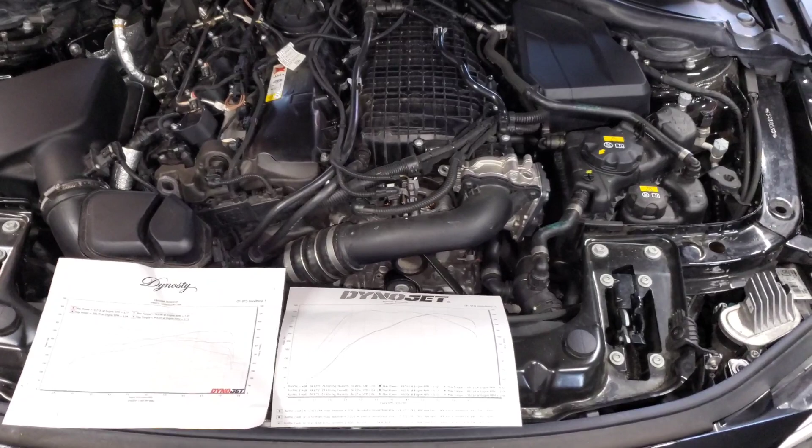So those are my numbers. With the custom tune, it hit 482 wheel horsepower on a Dynojet and a max of 502 foot-pounds.

These are my two dynos kind of side by side. Unfortunately, I couldn't do them at the exact same shop, but they are both on dyno jets, so similar setups.

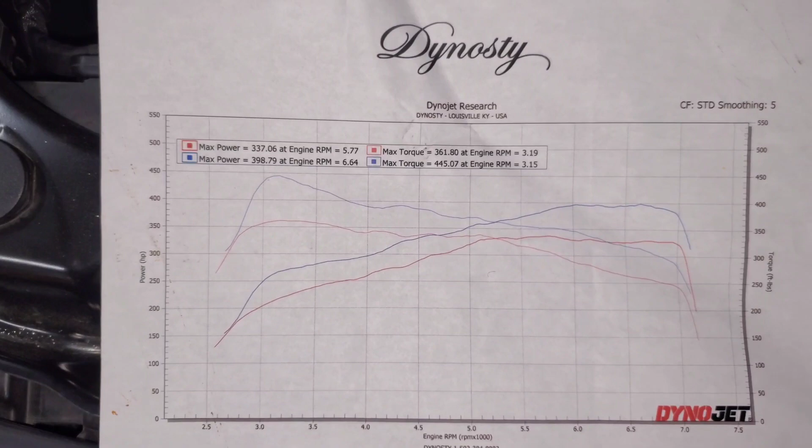On this first one, from stock to stage 1, I gained about 60 horsepower and almost 85 foot-pounds of torque. And then going to my custom tune, I gained about 85 horsepower and another 55 foot-pounds of torque.

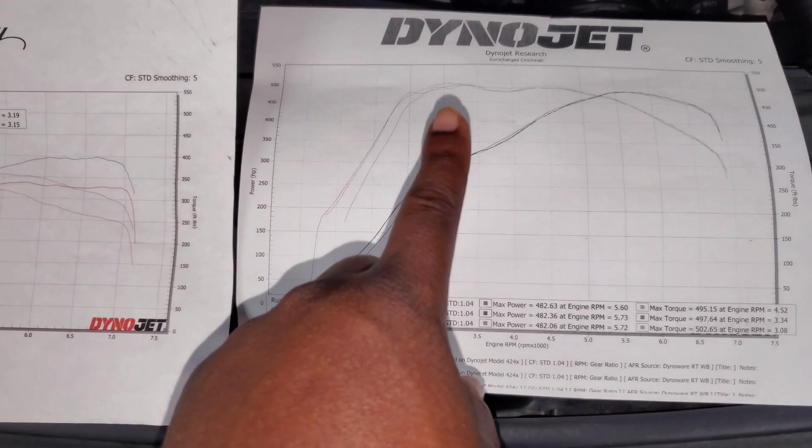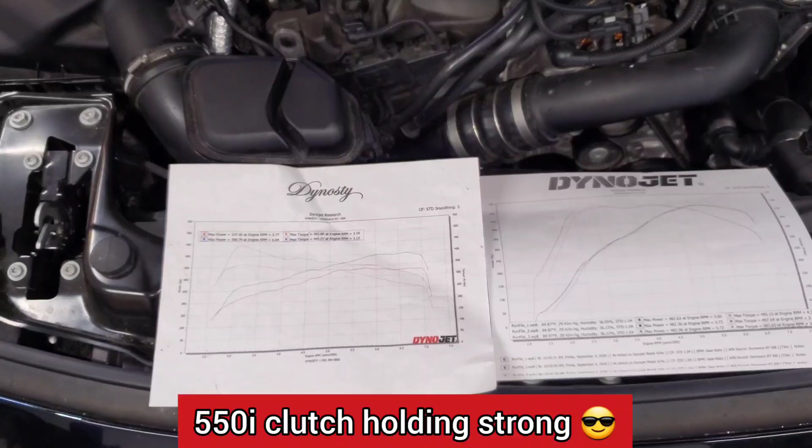So definitely noticeable gains. Even down low, you can see at 3,000 RPM, I'm putting out 500 foot-pounds now versus before, I was barely hitting 450. So more torque down low, more power up top. It definitely feels stronger everywhere, and the dynos kind of illustrate that.

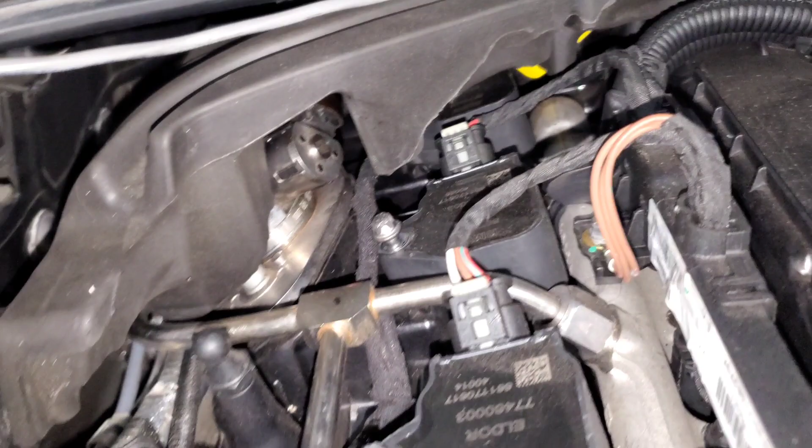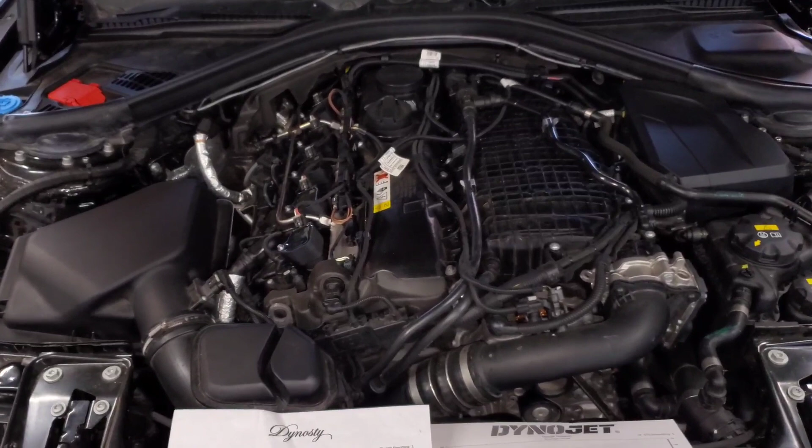So I've gotten a lot of questions about my setup. Just to confirm, I have the TU pump, I have the VRSF Downpipe. I ended up going back to stock intake just because the Dinan intake didn't net much of a gain in my experience. And then I added the CSF Heat Exchanger because this summer, with the temps going up, I wanted to help control the intake air temps.

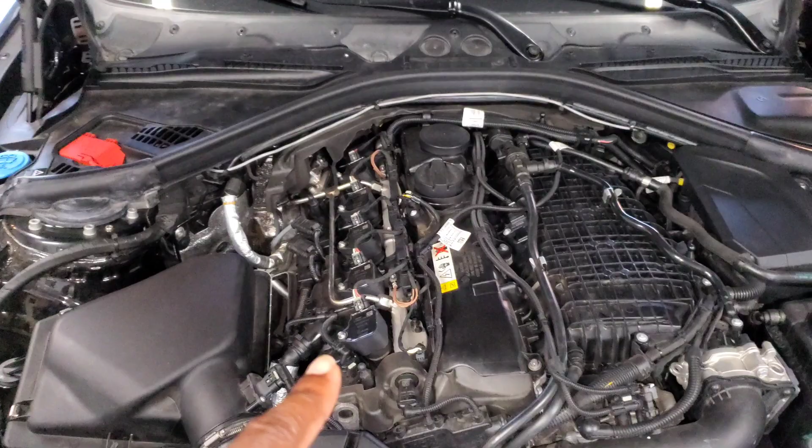I also did drop my spark plug gap. I still have the Champions, but when things started getting really hot, I started experiencing some spark plug blowout. So to compensate for that, I dropped the gap to 0.020 inches, and that fixed the issue for me. I've been beating on it every day ever since.

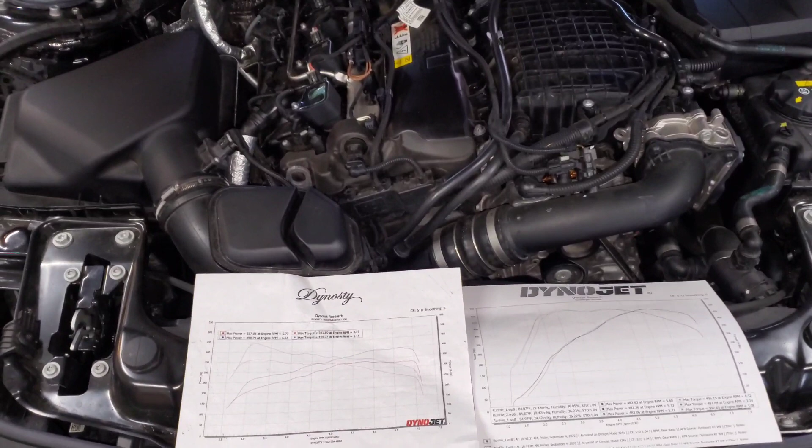So a quick review of my tuner. I went with F80 Paul, flashed over bootmod3, and he has been amazing to work with. He tuned progressively. Every revision was faster, and he worked towards the limits of the fuel pump.

I know a lot of people say that the TU pump can't support fully E85 or it'll crash, and I didn't experience any of that during the tuning process or during any of my driving experience. I've driven it down to 40 degrees Fahrenheit all the way up to 95 in the peak of summer, and I've had no issues. If you tell Paul what you want to do, whether it's road racing, drag racing, roll racing, or just daily driving like me, he can set you up with a safe tune that'll work in all the conditions you drive in.

So yeah, I mean, I highly recommend it. I highly recommend going with Paul, but I can't necessarily recommend the E85 tune.

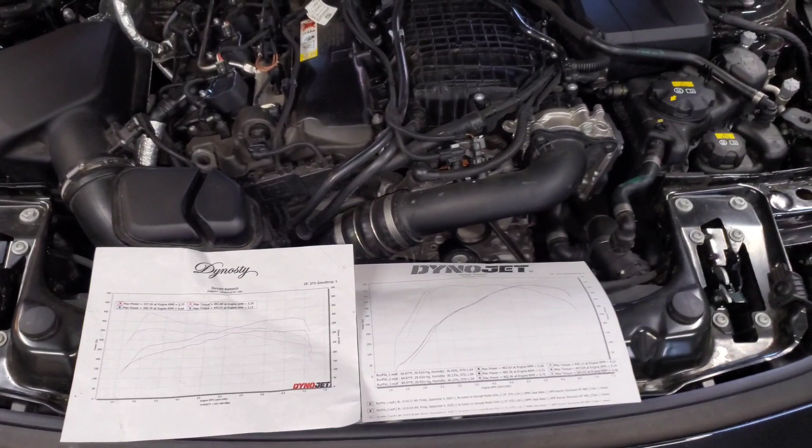Like I said, I installed the fuel pump back in December, posted that video, and then I started dialing in my tune in March of this year. Literally 3 weeks after I finished with my final revision, it took about 7 revisions, then MHD and bootmod3 came out with their off-the-shelf maps.

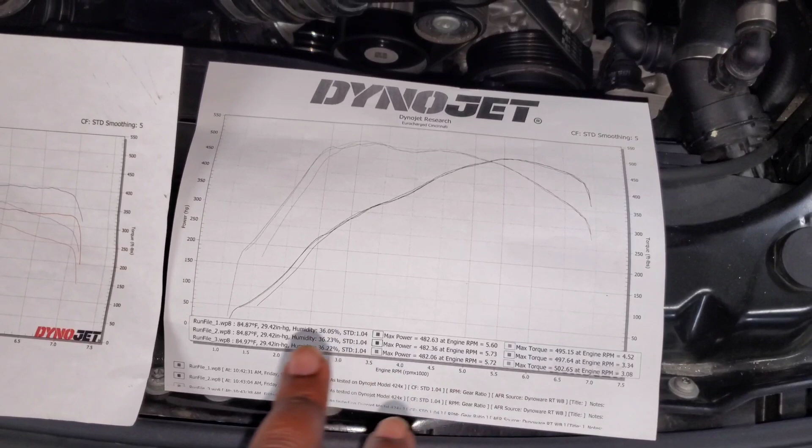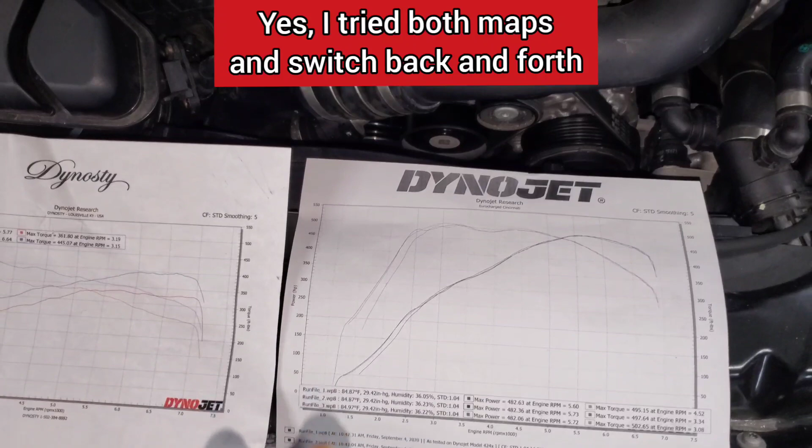If you compare that to my dyno, I'm hitting about 500 foot-pounds, and the dynos that I've seen on the Stage 2 Plus maps hit about 540 or 550, and I can see that in my logs as well. It hits more boost sooner because on E30 you can support more boost down low. However, up top, I am making maybe 10 to 15 horsepower more.

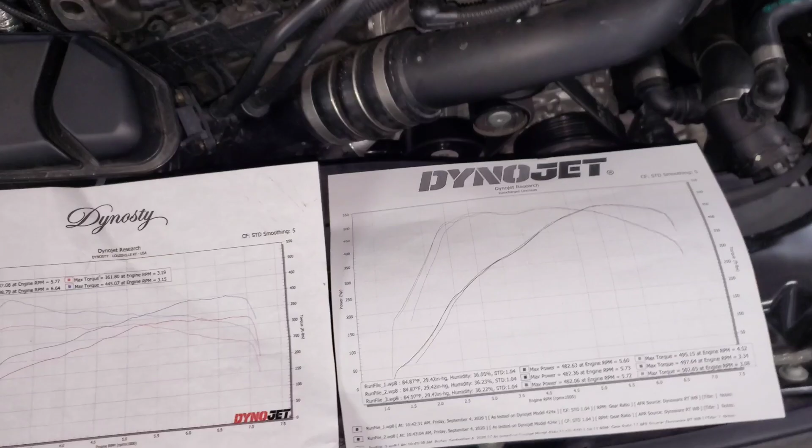So again, in my drag times and all of my testing, the E85 map is incrementally faster, but I can't necessarily say that it's worth paying for a custom tune to run fully E85.

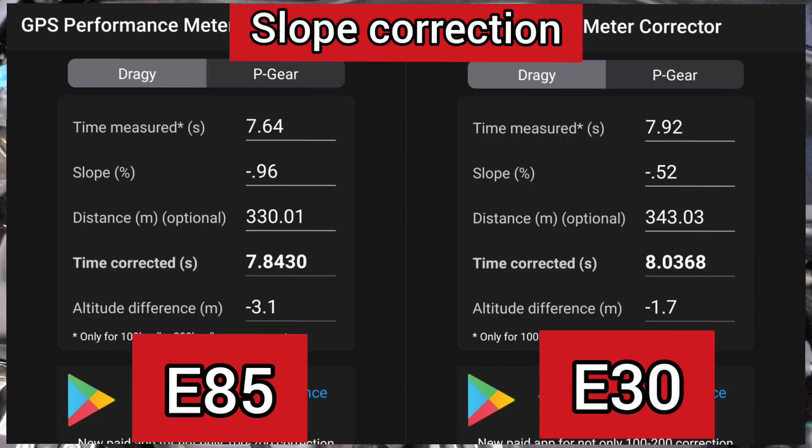The benefits that I do have right now is the car runs very strong, it runs cool, it smells good, like running with a catless downpipe. That was one of my aversions, is I didn't want to be able to smell gas in the car, and with E85 that smell is completely gone.

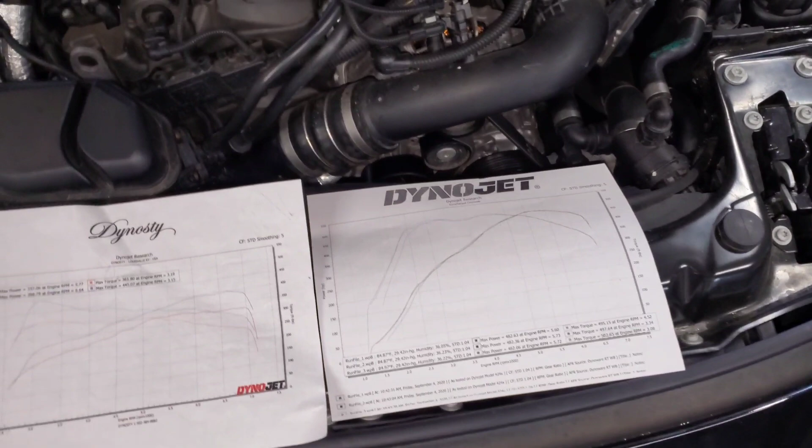But besides not having to mix and kind of those nice to have benefits, there really isn't a big power gain to be had. So if you're going with a custom tune on the TU pump, I'd recommend sticking with E30 to E50 to get the best of both worlds with low down torque and top end power.

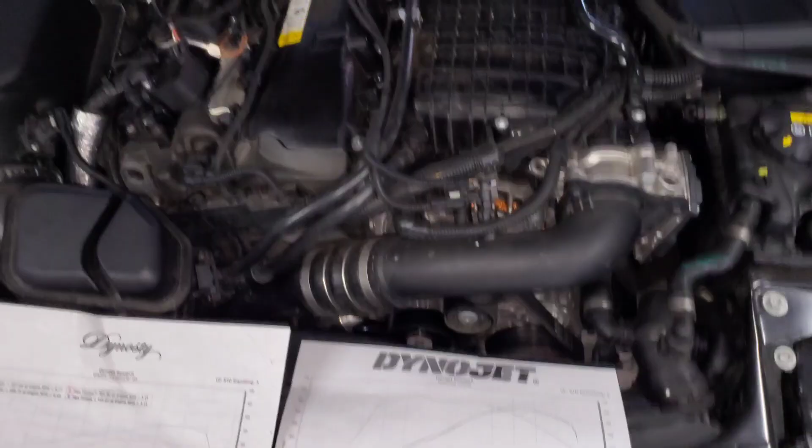But if you really want to run fully E85, get a Dorch Stage 1 or an FX150, and that'll really make the tune worth it. You'll be able to run more boost everywhere and make some really good power.